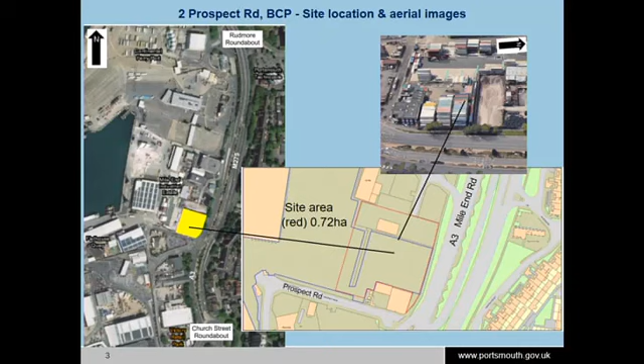So the site is on the west side of Mile End Road. At the moment, well, it was formerly some land that had stacked containers, typically 4 or 5 high, that you can see in one of those images. The red line is not all that easy to see because of other extraneous information on there, but it's just under three-quarters of a hectare. Next slide, please.

Now, I included this slide to show the relationship of the site to heritage assets on the east side of Mile End Road. On the right-hand side of that image is the former Air Balloon public house, 400 metres from the site. Just above the former Air Balloon there, you can see an image - there are existing trees, wide grass verges, carriageway, and the raised part of the Rudmore flyover. You can't see the application site from that particular listed building.

Then in the middle, you've got Market House Tavern, also known as Ferry Lodge, about 80 metres from the application site. And then on the left-hand side is Mile End Road Conservation Area, which also has listed buildings, some 120 metres from the application site. The report offers the view that there's no significant intervisibility between the site and those heritage assets. I've included a series of images, unfortunately they've come out a little dark. The way you view the setting of those heritage assets is very much affected, as Mile End Road is quite a barrier to that - the only way of getting across is via the subway. So the report offers a view that there is no significant impact by this development on those heritage assets.

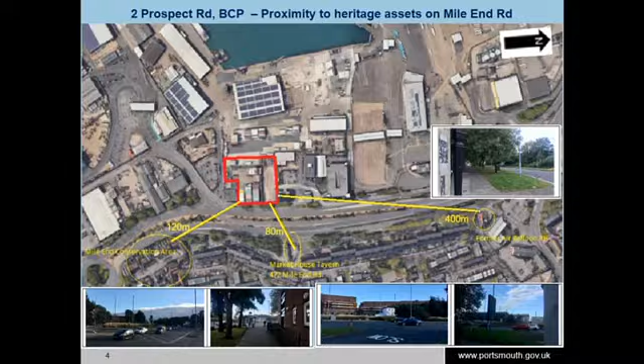So the proposal is for an L-shaped building. It's for a border control post, and the application also seeks use of the application site as land for port purposes. This border control post will provide a government inspection facility at the gateway for the entrance of goods into a trade area relating to animal welfare, public health and environmental health.

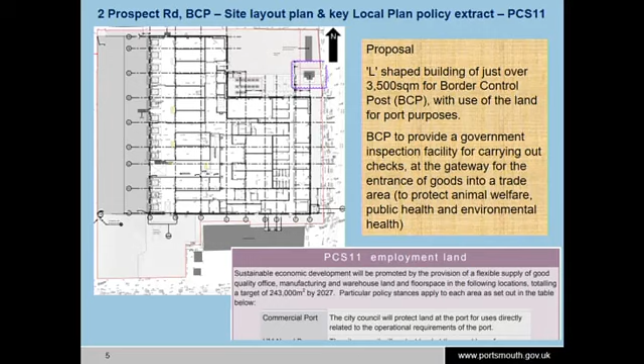The other piece of information I've included on that slide is key policy PCS 11 relating to employment land, and in relation to the commercial port, the policy is for the City Council to protect land at the port for uses directly related to the operational requirements of the port, and this proposal is fully in accord with that particular policy.

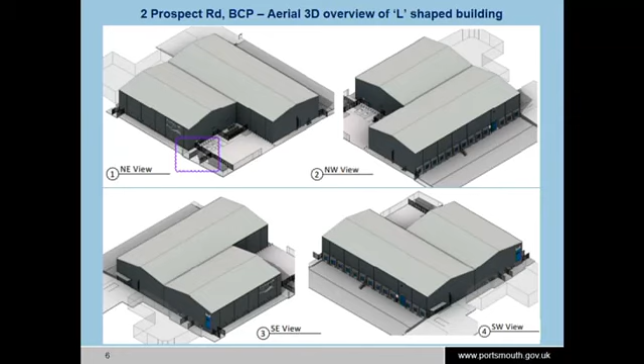Now, I've included these images just to give you a little bit of an overview of the shape and form of the building before I then show you the individual elevations. So have that in mind when I skip through the next elevations.

So this is on the east side of the building, which is already progressing to having a roof, and much of the cladding completed on some of the elevations. This is the part of the building you can see in that 3D southeast view facing onto the Mile End Road. That image was taken last Thursday, so it's pretty up to date.

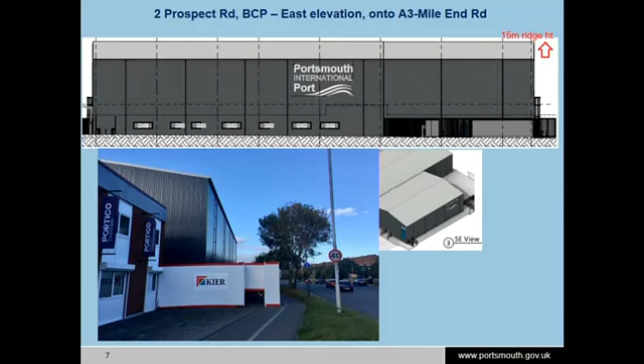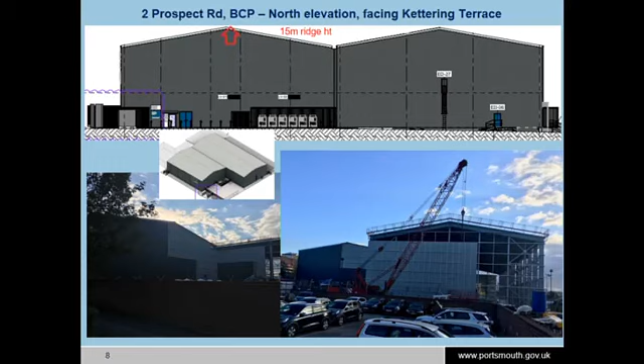This is the north elevation, so this faces onto Kettering Terrace and the Shell petrol filling station beyond it. I want to include two images. It sort of looks like the ridge height is different, but that's just a trick of perspective. The ridge heights of both of those that you can see on those end gables are a maximum height of 15 metres.

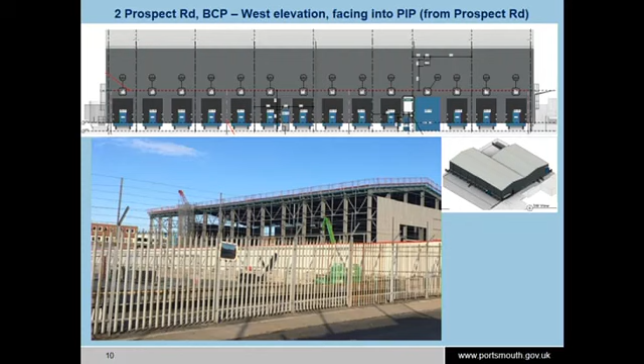Now, I've included these images and an extract from the applicant's transport statement. HGVs or other vehicles that have to go to the inspection facilities will arrive at the port and follow the blue line. Because vehicles exiting are prevented from turning right, they will need to go around Rudmore roundabout, doing effectively a U, before joining the carriageway within the remainder of the port estate to get to the inspection facility.

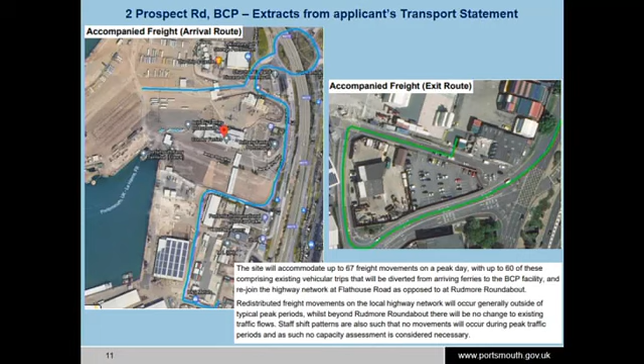Obviously, it's slightly less tortuous, the green route, for the exit route for that freight. It's expected that there will be 67 freight movements on a peak day, and you'll see from your report that it is not considered to have any significant impact on the local highway network.

So obviously you've got a full report covering all issues. You've also got some internal consultee comments on your update sheets. One on air quality from regulatory services, and the other from the contaminated land team, who are recommending a 3-stage condition: a desk study, and if necessary, intrusive investigation, and if necessary, mitigation.

During the life of the application, a contaminated land interpretive report was made available. It has been compiled by Ramboll UK Limited. They are part of a leading global engineering, design and consultancy company, so we can place some reliance on the information provided in that 329 page report.

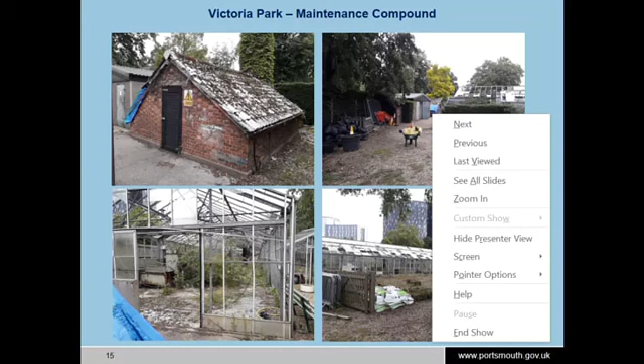The site isn't publicly accessible currently and is hidden by existing landscaping. Just bear with me a second... trying to read my further notes on this. Bear with me a second. Right, yes - so not publicly accessible and hidden by existing landscaping.

This slide shows some further photographs of the maintenance compound within the park, including the aviary, which is in the top left picture. You'll have to forgive me, I'm fairly new to Portsmouth, so I haven't actually had a chance to walk around this lovely park at the moment, and this application is being dealt with by a colleague of mine.

So these are some images of the proposed development.

The first part of the proposal is the construction of a single-storey building and canopy following the demolition of the existing greenhouses within the maintenance compound. This would provide an indoor space for education and exhibition use, office and meeting spaces, and two public toilets. The building would be sited just to the north of the existing glasshouses, bringing it closer to the main footpath through the park, but within the footprint of the greenhouse that was removed from the park, I'm told, in about 1998. The existing maintenance compound around the new building would be opened up to the public by the removal of sections of the existing high hedge and fencing and re-landscaped to form the new setting to the hub building.

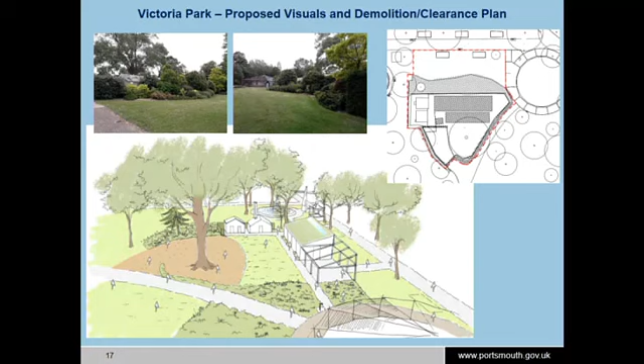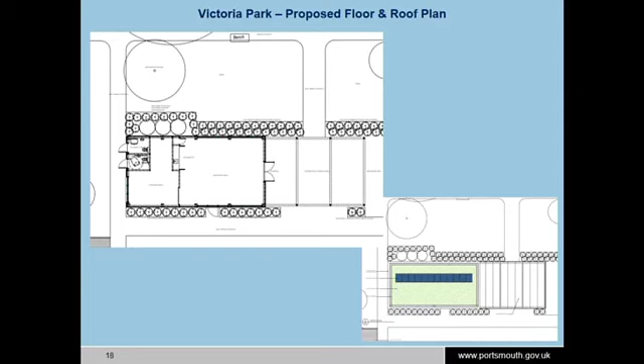Moving on, this shows the footprint of the building and the indication of landscaping proposed. The building is approximately 15 metres by 7.5 metres. An open oak framed canopy would continue the building form to the southeast, covering a further area of 10.5 by 7.5 metres, finished with a mono-pitched roof, 4.5 metres high at its highest point and 3.5 metres at the lowest eaves point. Externally, the building would be finished predominantly with arrowhead clay tiles with smaller sections of brickwork to the northwest elevation. The southern section of the building would incorporate large folding windows and doors within powder-coated metal frames, and with smaller windows and doors to the northwest elevation. A green roof would also incorporate solar photovoltaic panels.

These are some context views of the landscaping. The relatively restrained footprint, height, and sympathetic materials give the proposed design a polite and sympathetic character within its sensitive context. Although more contemporary in appearance and sited within a landscape context that seeks to visually open up the interior of the park to make it more accessible and inviting, it is considered that the building would sit comfortably within its setting, harmonising sympathetically within views across and through the surrounding historic park.

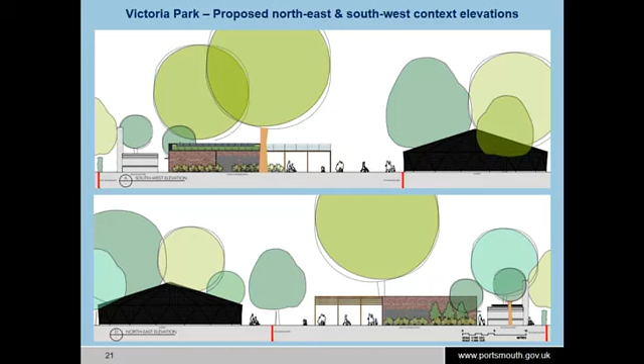This shows the indicative landscaping plan, and again, a condition is proposed seeking the approval of detailed design on that. It is accepted that the proposal would involve the loss of established and not insignificant areas of mature landscaping that contribute positively to the character of the park and provide natural screening of the built structures within the maintenance compound. And whilst this is unfortunate, it is considered that opportunities exist for replacement planting which could provide a visually appropriate setting to and assist the hub building settle into its surroundings.

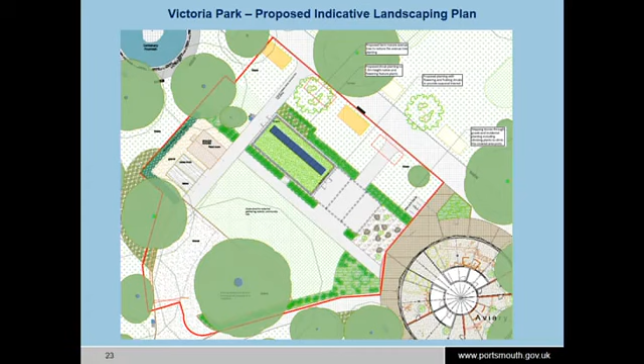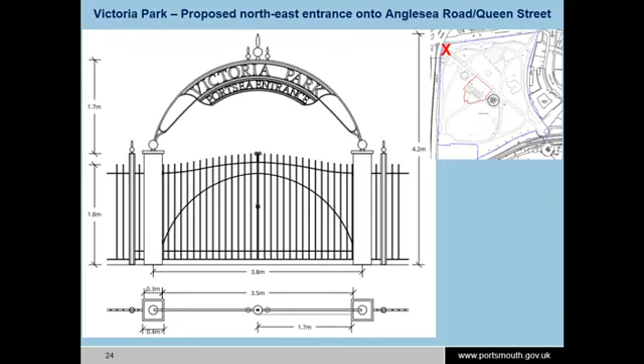The second part of the proposal is to create a new entrance feature to the northeast entrance onto Anglesea Road and Queen Street. This would comprise brick piers and a decorative metal archway as shown on screen in front of you. The entrance is of an appropriate and sympathetic design and would improve legibility of the park. The lower image there shows a visual impression of what the new archway would look like on new piers. A planning condition again is recommended seeking the finer details of that proposal.

Overall, it is considered that the proposed development would preserve the special architectural and historic interests of the park and the character and appearance of the conservation area. The introduction of a community hub, a community building at the heart of the park within a new open landscape setting, is also regarded as a positive addition to both the park and the communities that use it. And the officer recommendation is therefore conditional permission. Thank you, Chair.

All right. Okay, you're putting it up on the screen. If we go back to slide. Do you want to pop your microphone on?

Contemporary design building, in my view, with a mono-pitch roof. The vertical walls here, as shown on the upper and lower slide, are with this handmade tile cladding. You can also see on the top picture here an element of the green roof that would also house photovoltaic panels.

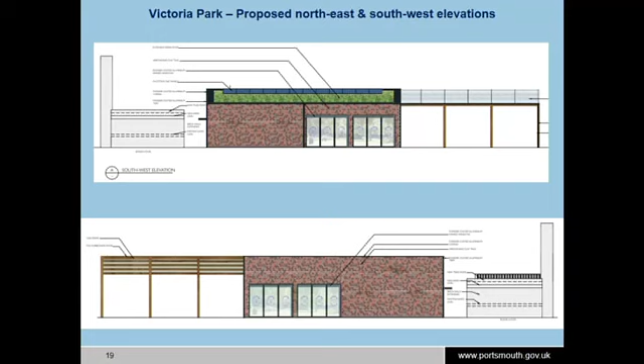Yes, that's the design of the building. We've heard about the consultation, how it's reached members of the public, park users, and 30 groups were mentioned. Bearing in mind the coronavirus problems, it's been quite an extensive and successful consultation.

Members, if there are any more questions... okay, well thank you all very much for coming. I'm going to move the officer's report. I note that this application site is 80 metres from the university building, and they can talk to our various teams subsequent to this meeting.

It is an urgent matter upon which a lot of money is decided, to do the things that people tell us that they want. I'm sure Councillor Atwell is going to second this in a moment. This involves public loos, which people have been telling us they want. So these are new and modern public facilities, community facilities.

I mean, I suppose I could say, what is there not to like about this? It's a big commitment to the park, and we see other things happening there which has been on the cards for some time. It's clear a huge amount of hard work has been done by the parks team and the design teams. We see, as ever with these council applications, the solar panels on the roof, a green roof. I think by the lack of questions, that all the boxes are being ticked.

Thank you, Chair. Members, application reference 21-01137 LBC at Victoria Park again. Alterations, cleaning and repairs of the HMS Shah Memorial, the monument to Admiral Napier and the Centenary Fountain, again as shown by the 3 red X's on the aerial photograph in front of you. This is a listed building consent for alterations, cleaning and repairs as described.

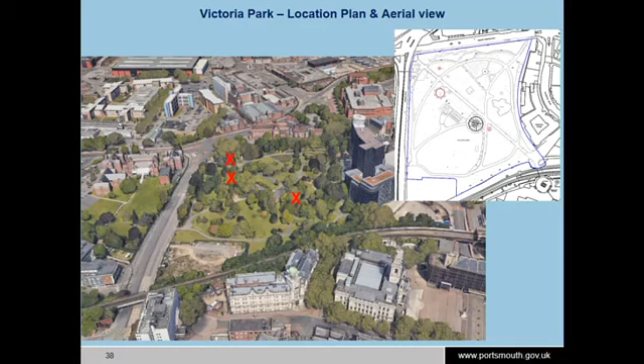The first element being the Centenary Fountain. This will involve the restoration and enhancement of the upper jet to the fountain. As you will see, the left-hand photograph on the lower tier shows a rather ugly sort of spray arrangement. That was apparently to restrict the spray to prevent the possible spread of Legionella. I'm advised that the water cleanliness these days is sufficient to eliminate that risk. Hence the proposal to put back a much more ornate spray arrangement as befits the fountain.

The consent is also sought for specialist steam cleaning and jet washing where required, repainting of the cast iron work, and the 4 swans and metal railings.

Moving on to the monument to Admiral Napier - sorry, I think this is actually the HMS Shah Memorial. This will involve the removal of the 4 black marble plaques and specialist steam cleaning. The plaques were put in place at some point in the past; I'm afraid I don't have the date to hand, because a view was taken that the original engraving on the limestone was getting so eroded and difficult to read that these plaques were put up just to show whose names were engraved on the monument at the time. So these plaques, which are somewhat out of keeping with the original monument, are to be removed by specialist operatives using hand tools and so on.

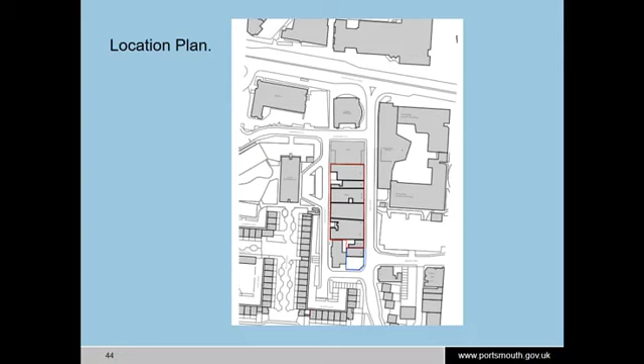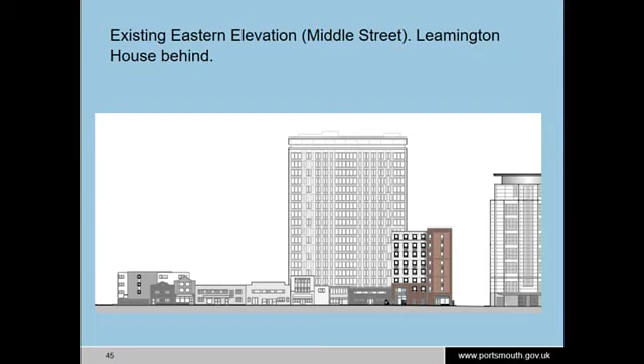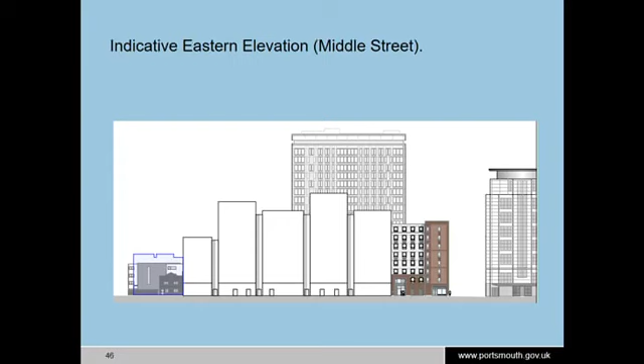That's to identify the site for you on that elevation. So that's where the 6 to 11-storey buildings of 163 flats would be inserted. Because appearance and layout are reserved matters, this is an indicative elevation, but it is an accurate elevation of the heights you can expect to accommodate those 163 flats and 3 commercial units. So indicatively, the applicant has shown some individual building elements, 5 there of different heights, with the ground floor commercial facing onto Middle Street.

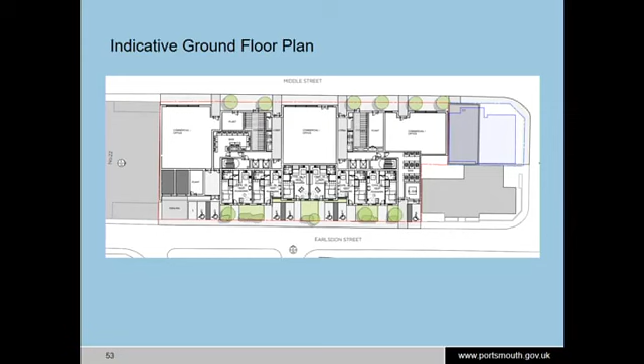This is an indicative layout of the ground floor plan, just to give you an idea of how the development could be laid out to achieve 163 flats. A mixture of 1, 2 and 3 bedroom flats are indicated, all complying with the nationally described space standards. So we've got a good idea of what sort of flats could be accommodated in here at 163 total. You can see some articulation of the building that you will have noticed also in the first elevation to give an indication of how that building could be laid out.

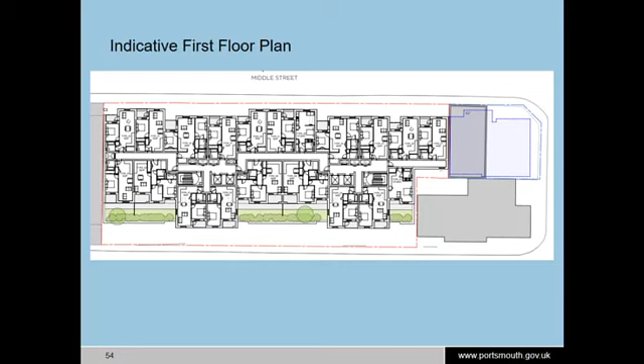Here's just one of the upper floors to show you that the intended purpose of the roofs is to have some communal shared space for the residents, in order to provide some outdoor space, some amenity.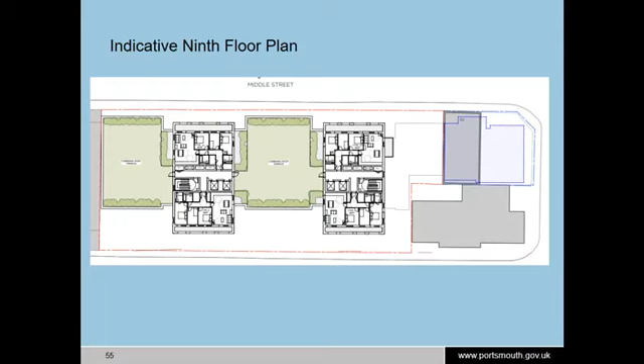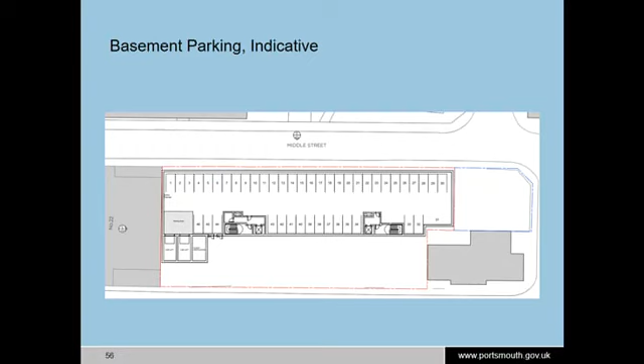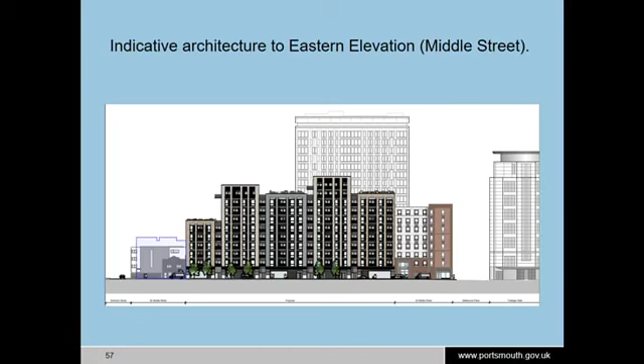But if we go to the next slide, that does show the proposed student accommodation, so you've got a choice of both - either should that appeal fail, how it may look, or the step up if it is allowed at appeal. So you've got a feel there for the scale, potential architecture, articulation, and the ground floor commercial units there as well, with shop fronts or commercial type frontages.

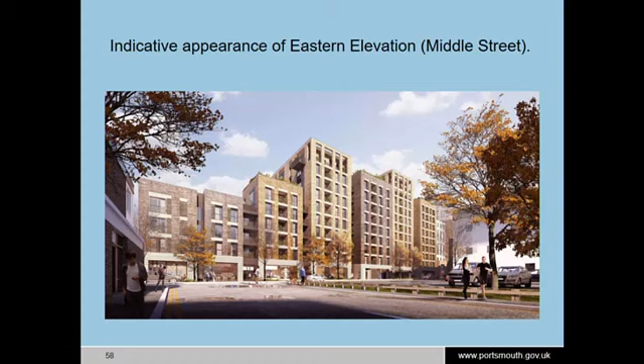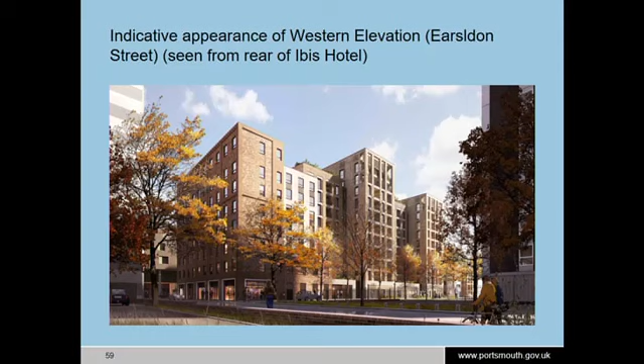So the first two elements you can see, centre left, the brick, and then the render, that's the existing 8-storey student accommodation. The rest of the development you can see is the proposed development in front of you today. You can just about make out some of the articulation at ground floor level for the individual units on the front there.

If I perhaps take you back to the supplementary matters report, it was just to tidy up three matters from the published report: public open space, affordable housing review mechanism, and the Solent protection areas, special protection areas mitigation. With respect to public open space, members may have noticed in the report that matter wasn't resolved, and we were still exploring that, and that will carry on beyond today with whatever your recommendation may be for the inspector. But we did feel that the scheme ought to provide some public open space with 163 flats.

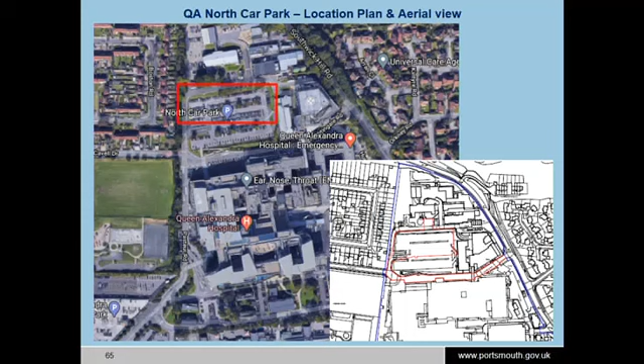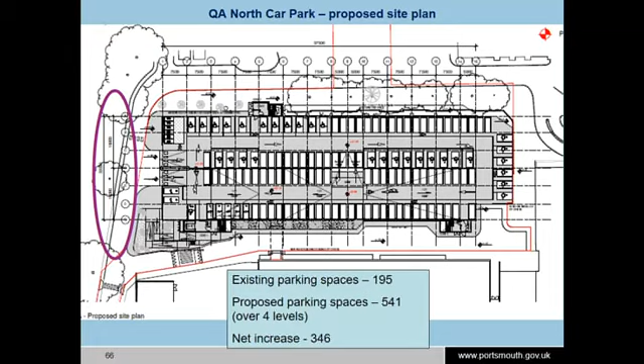So the considerations are that due to the presence of the high voltage cables, which provide power to the hospital, it is unfortunately not going to be possible to provide the additional tree planting that condition 14 sought, and hence the application to remove it is before you today.

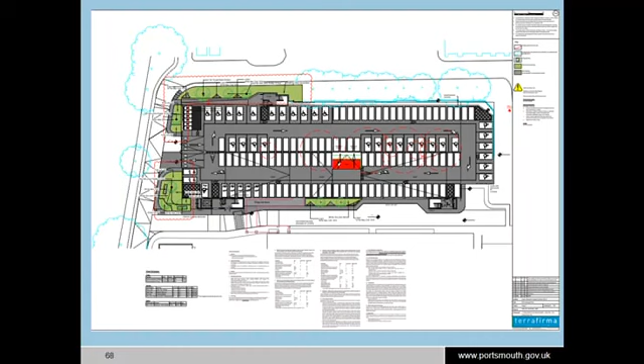Thank you. Members, there you have it - not possible to do it. Any questions?

Comments then. So I move the officer's report and the recommendations outlined in the report. Anybody like to make any comment or argument?

Councillor Fielding: Obviously it's disappointing that they're not able to proceed with the tree planting, but given the circumstances, it would be interesting if there's alternatives. I know they've talked about hedging, but that would only be at the height of probably a boundary fence. So I think we've just got to weigh it up really as to... it's the utility cabling that's gone underneath. So to put anything there, I imagine, would interfere with that at some time in the future.

Councillor Hooper: Yeah, I would just add that there is an additional safety concern here. I did refer the case, as Councillor New will know, to Penny Mordaunt's office. I love planting, councillor, I think it's essential, but the issue is we have had a lot of wood scattered across Southwick Hill Road with the downdraft of the helicopters coming in. So actually planting around there can also have additional safety issues with the emergency helicopter. It's certainly affected people using the road, I know that for sure. And we see that there's four trees, so they try to help. So it's unfortunate, but there we are.